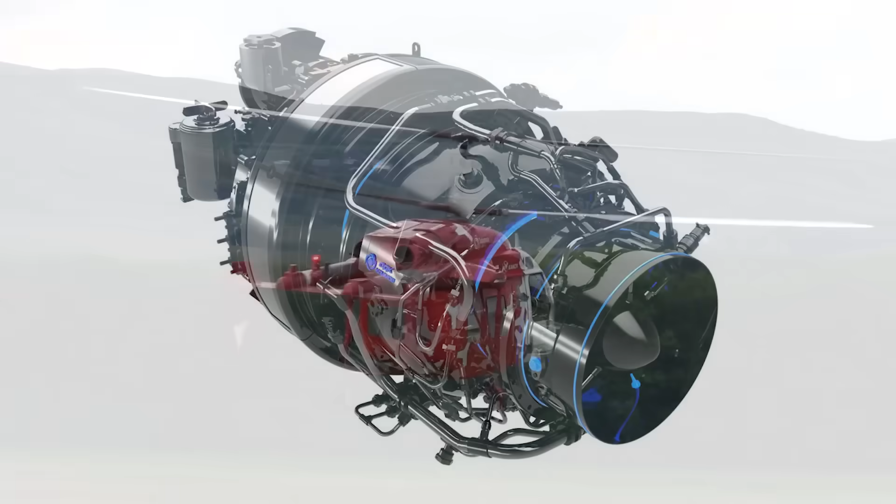In a recent video, I talked about the new Russian VK-1600V engine, which is preparing to lift the Ansat and Ka-226 helicopters into the sky. This engine is not very powerful and is as simple as possible, so simple that some people actually got bored. Well, it's time to add some spice, because the VK-1600V has a brother: more powerful, complex, and curious.

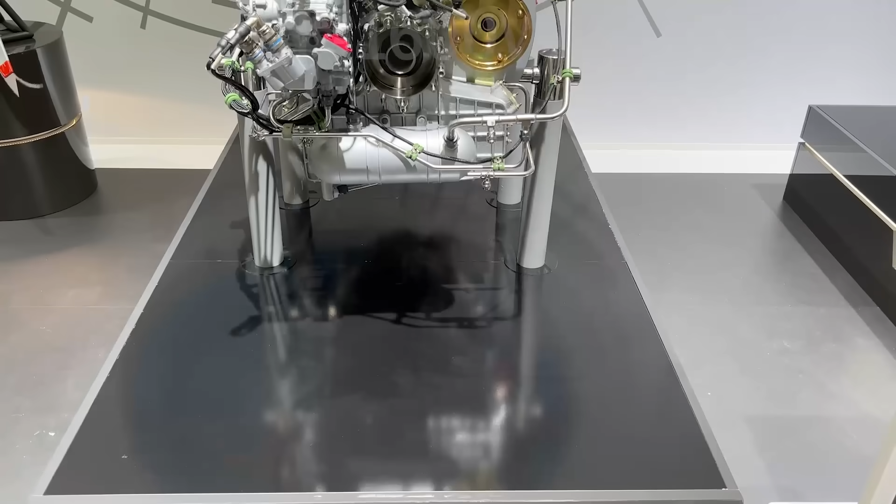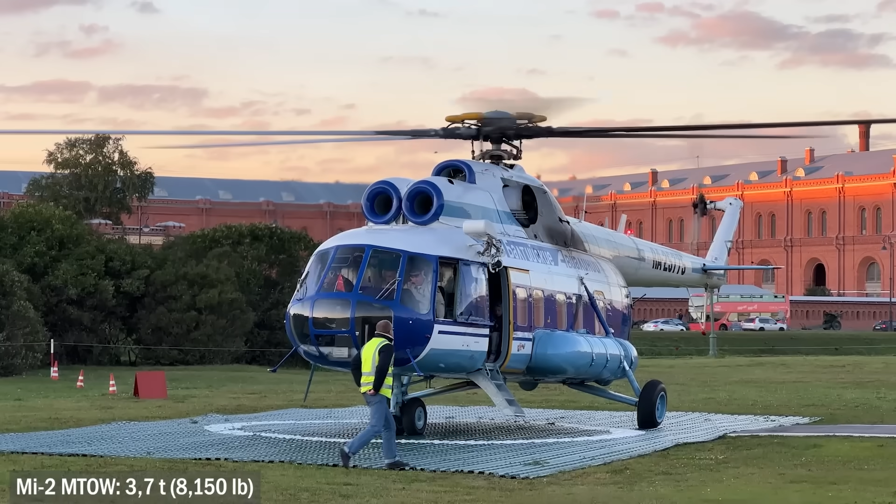In the story about the VK-1600V, I talked about light helicopters and their adventures in the USSR and Russia. In the case of this engine, we are talking about medium helicopters, and their history is simpler. There were practically none. Light helicopter transportation was carried out by the Mi-2, weighing about 3.7 tons, and a step higher is the Mi-8, a workhorse that flies anywhere and anytime, perceived by many as a kind of minibus. But actually this minibus is a hefty 12-ton helicopter like the Sikorsky S-92, and it's very difficult to call it a transport slightly larger than the Mi-2.

In situations where a helicopter with a carrying capacity of more than 4 tons carried 10 passengers and 5 suitcases, economists cried and asked to make something more optimal. The solution to this problem was supposed to be the brainchild of the Kamov Design Bureau, the Ka-60, which a little later grew into the current Ka-62.

And this project became a great long-term construction. There were many reasons for this: lack of funding, project stops, engineers being busy with more interesting programs. Demand was also small. In an open-world market, many operators without bothering went to foreign manufacturers, who offered excellent machines for every taste. In addition, the Ka-62, like its peers, turned out to be very dependent on foreign suppliers. A significant part of its components were purchased abroad, which cut off the interest of government agencies.

And then we found ourselves in 2018. As part of several programs of the notorious import substitution, various components of the helicopter began to be replaced with domestic ones. And of course the main one was the engine. The power plant of the Ka-62 was a pair of Safran Ardiden 3G turboshafts, and the fiery French were to be replaced with a new engine that met modern requirements.

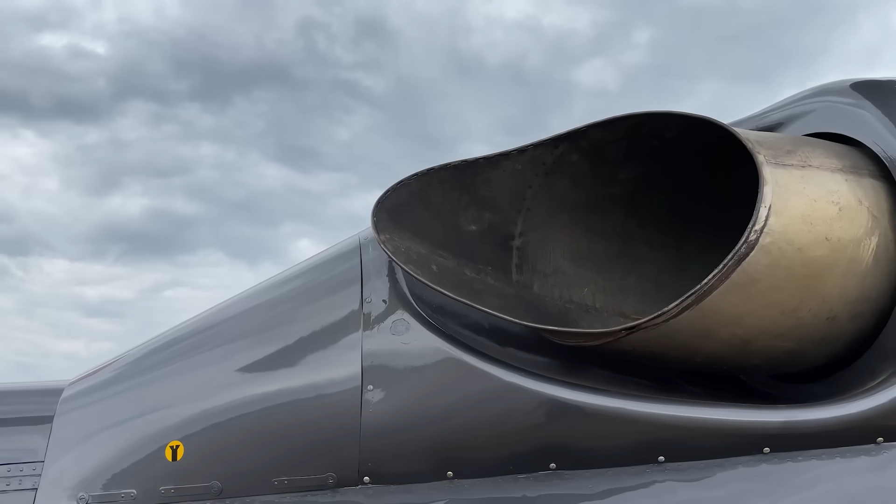The United Engine Corporation, UEC, has finally plucked up the courage to enter one of the largest and most competitive niches in the market for turboshaft and turboprop engines, in which all the large and toothy sharks are present. By 2019, the project was officially initiated and implemented within the walls of the Klimov Design Bureau, located in St. Petersburg. Yes, the Klimovs were working on 2 projects at once. One team was making the VK-1600V, and the second, today's hero.

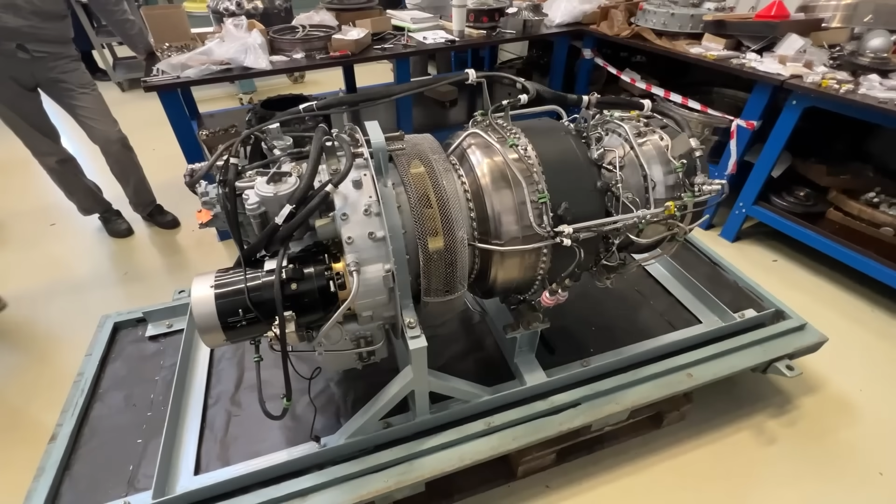Okay, enough history. It's time to look at this piece of engineering. Standing before us is the prototype, which is now being actively tested on stands, assembled and disassembled, a live test model. The general concept of creating this engine is similar to its brother: it should be quite simple, cheap to operate, economical, and reliable. The general design is more or less classic.

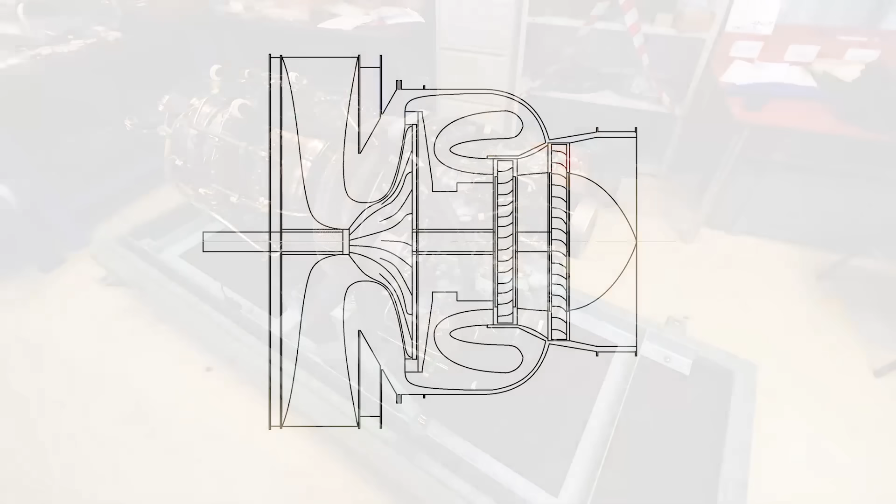Air enters the engine through the annular air intake, is pressurized by the compressor, ignited in the counterflow combustion chamber, rotates the compressor turbine driving the engine systems, and rotates the free turbine, which transmits rotation to the transmission and ultimately to the rotors. But the power here is serious.

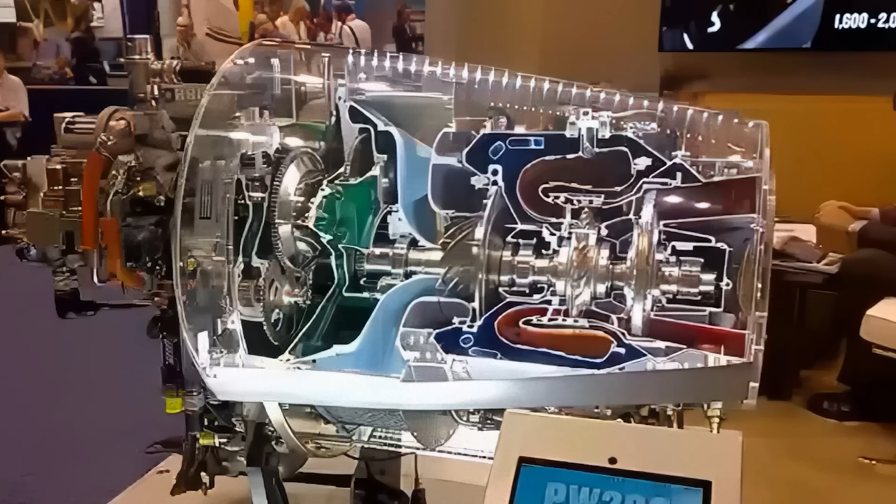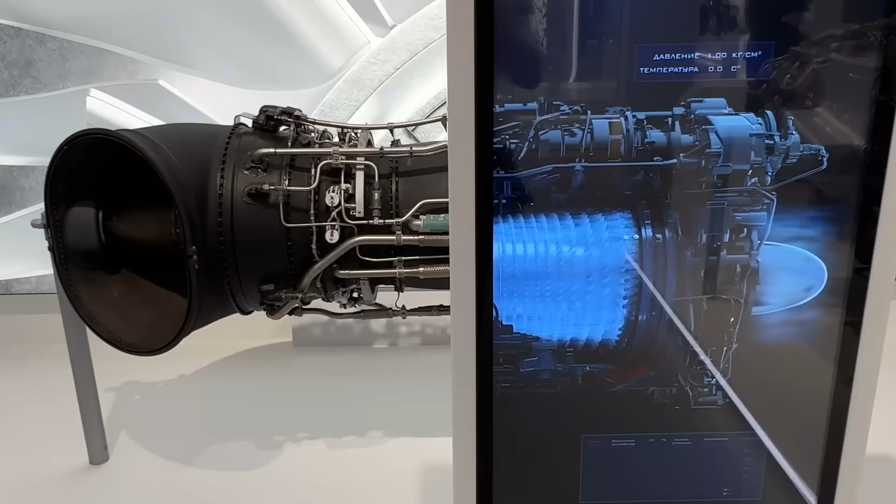In cruising mode, it is 600 horsepower and 900 horsepower - yes, there are 2 cruise modes. At takeoff, it is 1600 horsepower, plus emergency mode, when the engine can be cranked up to 1750 horsepower for 2.5 minutes. Unlike the small turboshafts, which for the sake of optimization are as narrow as possible and differ little from each other, engines with power ranges like this one are more complex, and designers have some room for creativity. There are different dimensions and layouts, assemblies of different types of stages, axial compressors, centrifugal ones, whatever your heart desires.

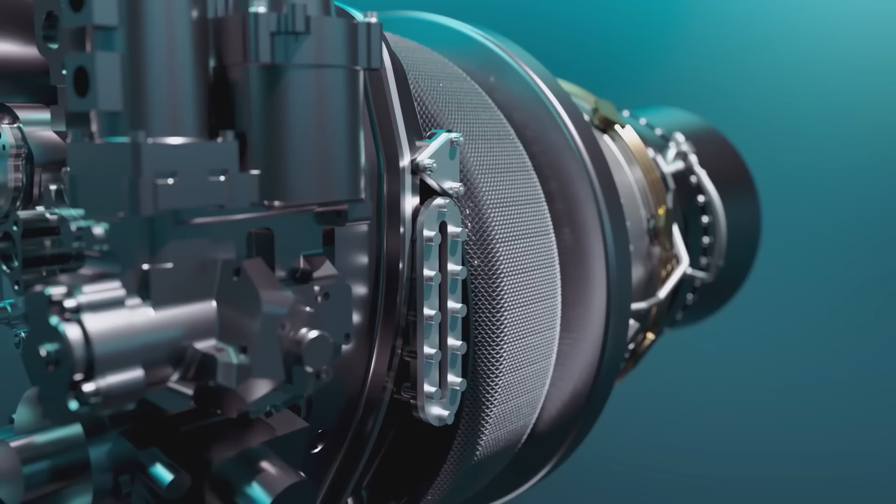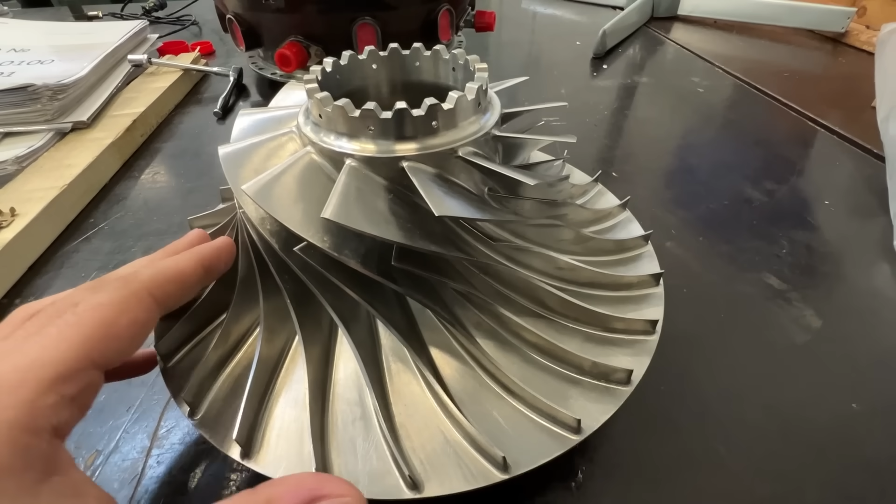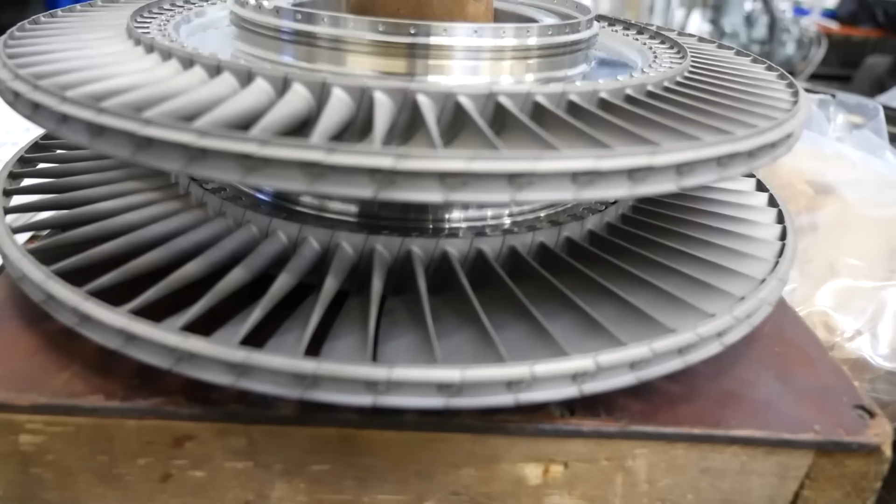Engines from different manufacturers are slightly different in design. In the case of the VK-1600V, the engine builders, while maintaining a generally simple layout, installed a 2-stage compressor, two centrifugal blocks, behind the counterflow combustion chamber there is a two-stage compressor turbine, and behind them a two-stage free turbine. The Klimovs did not come to the 2-2-2 scheme immediately, but as a result of a large amount of research that showed the benefits of installing paired stages instead of single large ones.

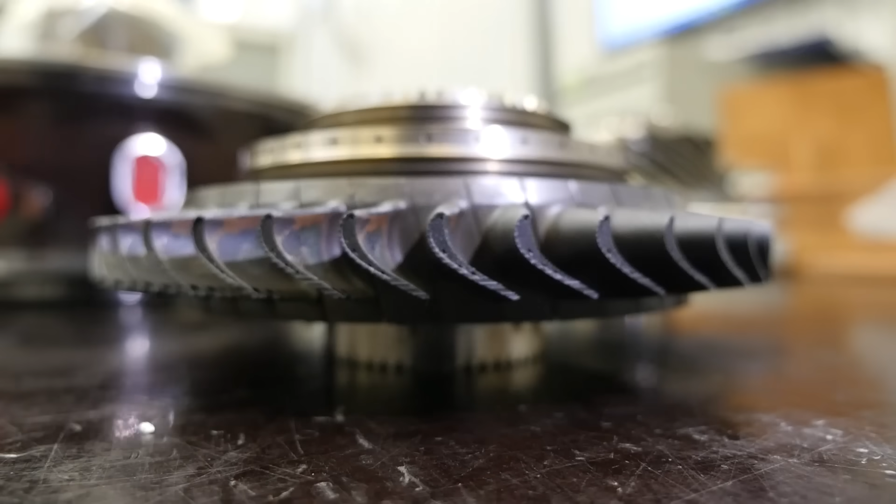Firstly, a large turbine increases the size of the engine, and secondly, there is a not entirely obvious conclusion: two stages in total are lighter than one. It would seem strange, but if you look closely at the disc itself, you would notice that a significant part of it is practically monolithic metal, and in a large disc there is a lot of this metal, which adds significant mass. Even with their small dimensions, these things are terribly heavy.

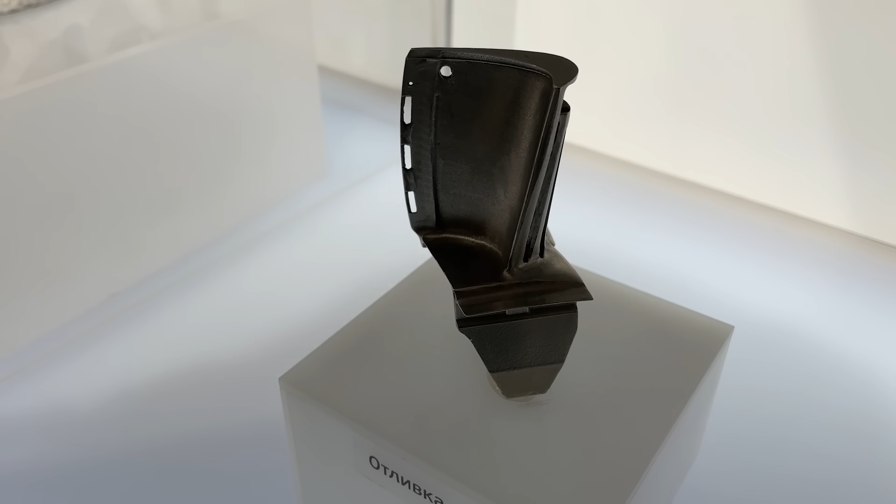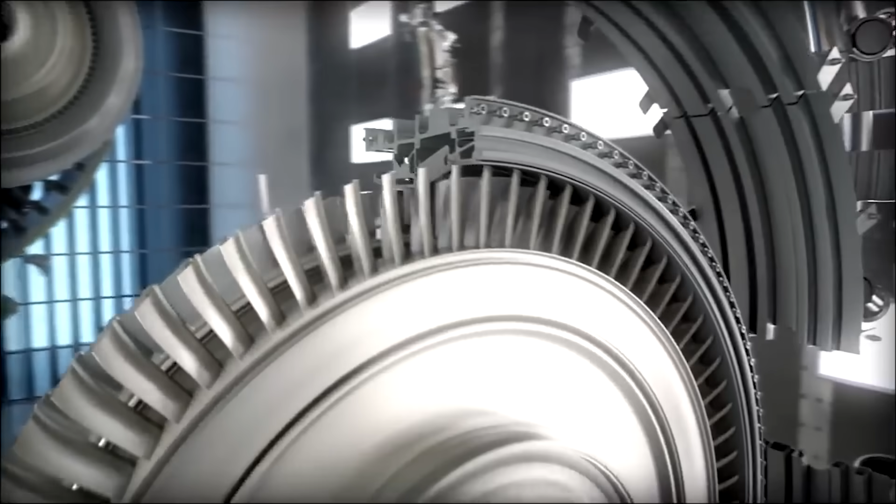Another useful solution from Klimov was the installation of cooled blades on the compressor turbine, which takes on most of the heat. Each blade has channels through which air passes to cool it. This allows an increase in the temperature at the outlet of the combustion chamber, increasing the efficiency of the system. This solution in engine building is not revolutionary and is quite actively used, but it is used mainly on large engines, and in the VK-1600V class it is considered a bit too complicated, so it is quite rare.

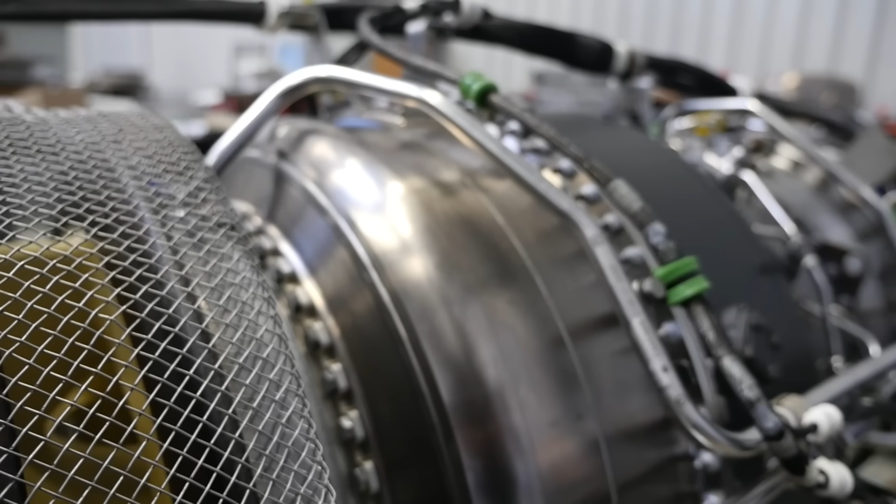The Klimovs decided to take a step forward here. There is a risk of complicating production, but the return could be decent.

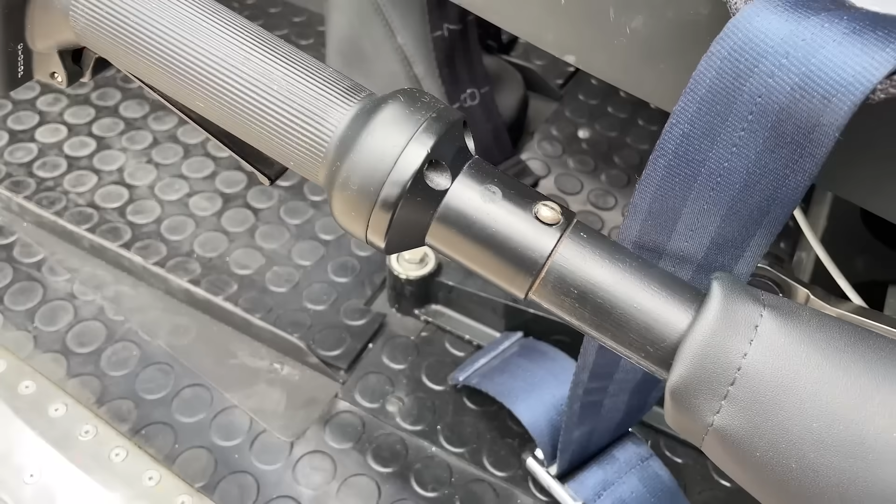At the front of the engine there are auxiliary elements: transmission, cooling, fuel and oil systems, and so on. The automation here is also new. The digital engine control system FADEC on the VK-1600V is the BARC-15V unit. The Klimovs did not complicate their lives here and unified the BARC-15V with the BARC-5V, which is also made by them for the VK-650V. The hardware and software are different, but externally it is difficult to distinguish them. They are practically the same black metal box.

In general, the VK-1600V remains at the level of its colleagues. Nothing supernatural, but it should not be inferior in anything. Its dimensions are quite optimal. Again, it can be installed on the Ka-62 or other helicopters of this class without any modifications. For the sake of simplifying adaptation to the new engine, in terms of dimensions and connection schemes, the VK-1600V was made very close to the Ardiden 3G, so remotorization should go without problems.

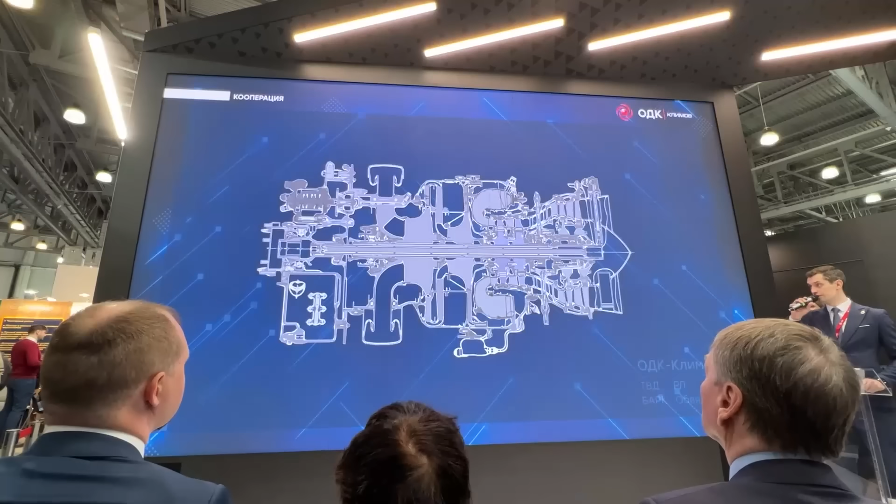Now comes the obvious question. In the video about the VK-650V, I said that the engine is as simple as possible, and by adding modern solutions and technologies, Klimov managed to create it quite quickly. Work began in 2019, and certification is already planned for 2024. The VK-1600V is larger and more complex, and yet it is created at almost the same speed. The secret here is simple: the modern solutions used to create its little brother, the 650, have been pushed almost to the limit.

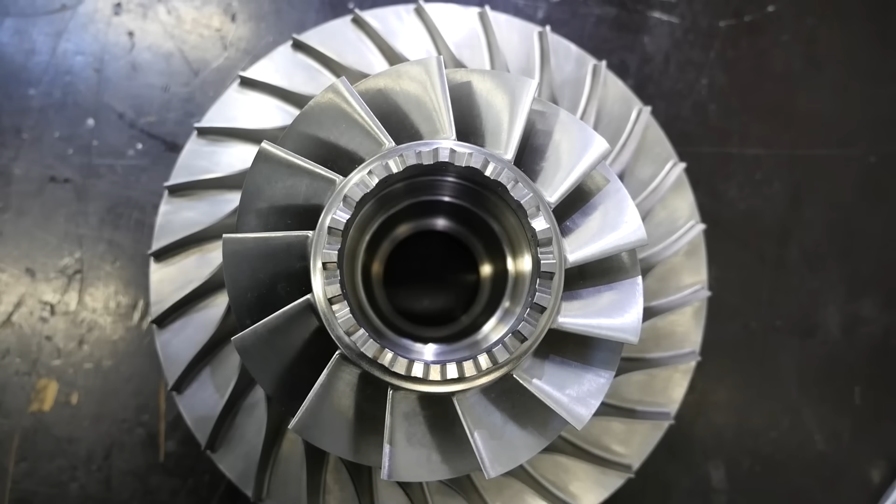Digital design here is taken to the absolute level. Computer modeling, 3D, digital twins, everything is now on screens, no paper. Such solutions can significantly speed up work. The question may arise: here the potential was used to the fullest, but was it not the case for the 650? Why not? I don't know. It may be possible that there was simply not enough resources for both projects.

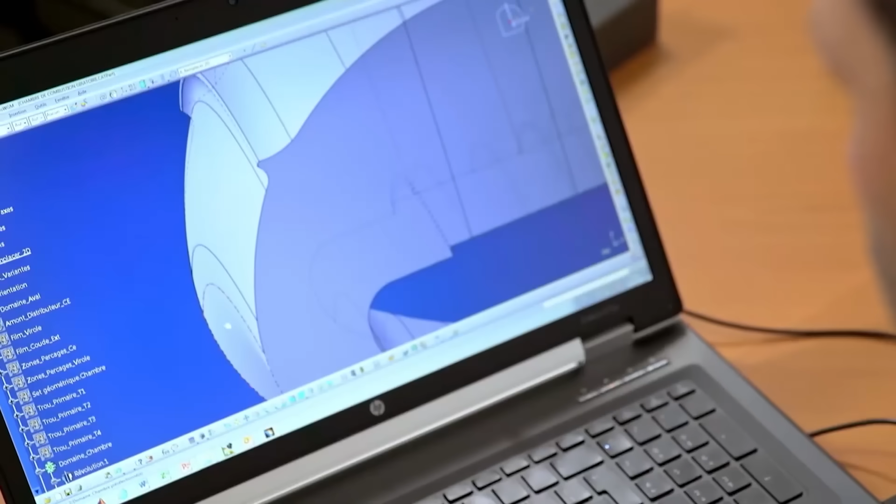All these methods simplify the overall work, but they need to be mastered first. At a minimum, highly qualified specialists are a hard-to-get asset.

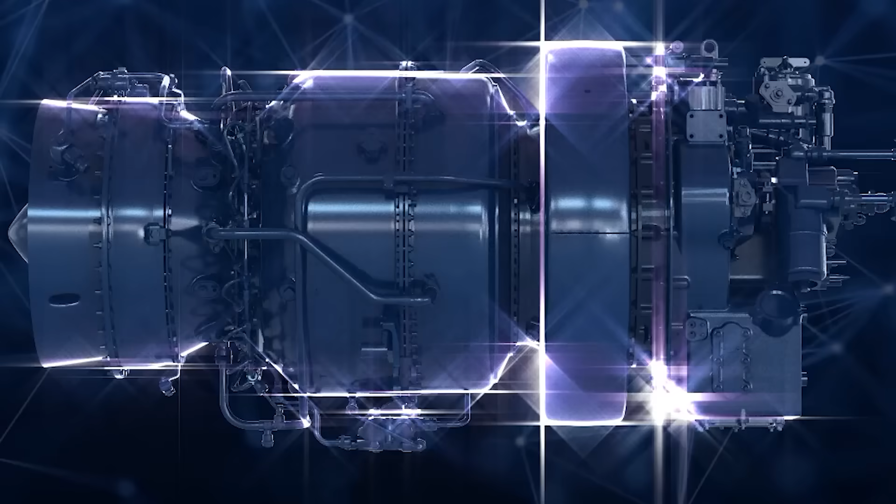Additive technologies are also used extremely actively. In the process of creating demonstrators and prototypes, they printed everything they possibly could, and not only simple elements, but also complex parts made of heat-resistant alloys. About 70% of all casting on prototypes was done on a printer.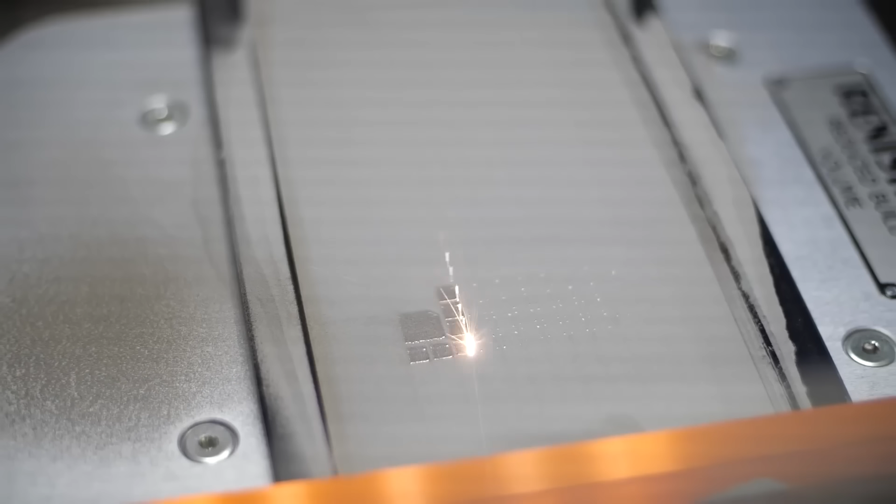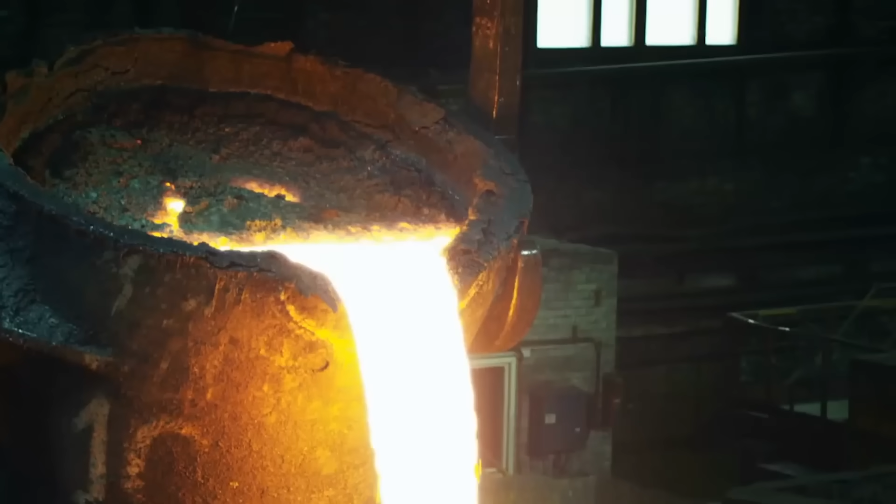Coupled with the fact that the engine was created on a computer from the very beginning, the transfer of documents to specialized production was quite simple, and they did everything quickly. It took 2 to 3 months to create parts, but if everything was done with a classic serial approach, the same result would have taken 10 months every time.

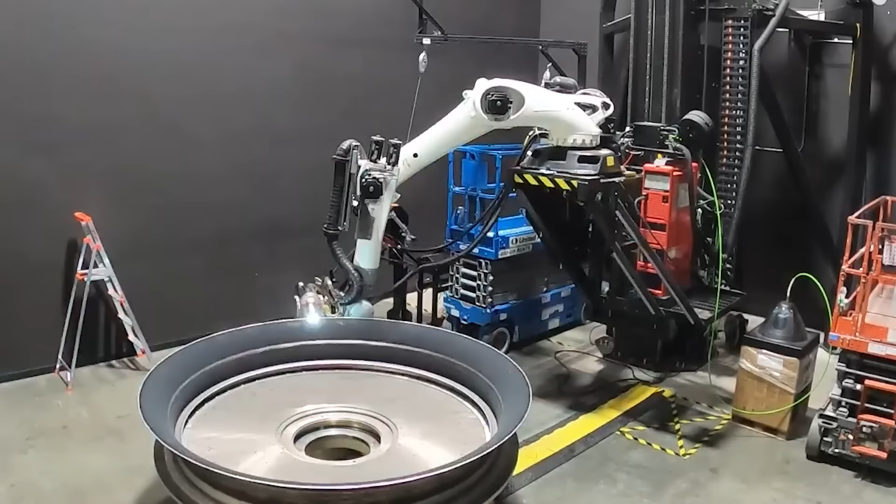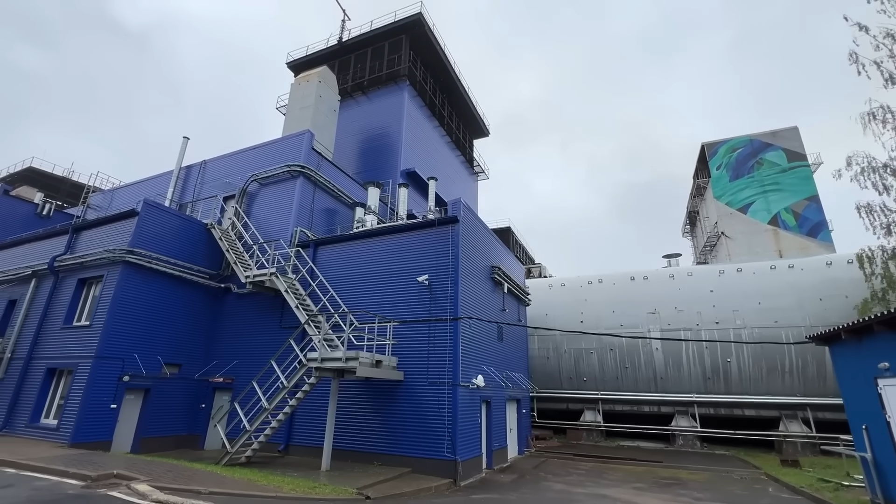Considering that during the testing process, parts were created, checked, rejected, and created anew, without 3D printing, the work would have lasted for many years. Thanks to all this, testing is being carried out much more actively than usual. To speed up work on the program, Klimov engineers built 2 test stands at once, now operating in parallel.

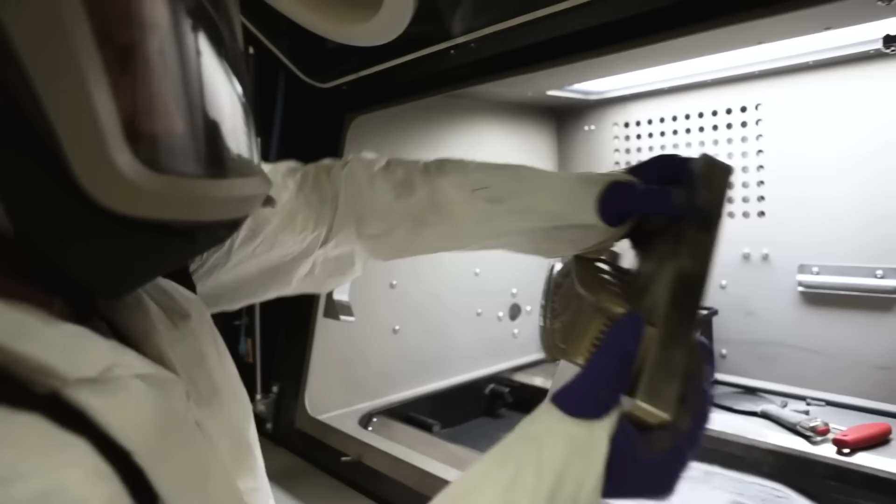Again, there will not be a huge number of printed parts in the series, a regulatory framework and certification of technologies are needed, and printing serial parts in large quantities is more expensive than doing it on a classic production line. At the same time, I would like to note an interesting test result. The printed parts have a very decent performance, and in theory, could be used on production motors. So the question here is not so much technical as economical.

The engine at the moment continues testing on stands and is being prepared for installation on the Ka-62, now at the level of digital doubles and then live, with subsequent testing and certification of both the engine and the helicopter. Serial production should be deployed in 2025, and by 2026 we should see the Ka-62 with the VK-1600V engine in operation. The plans are ambitious.

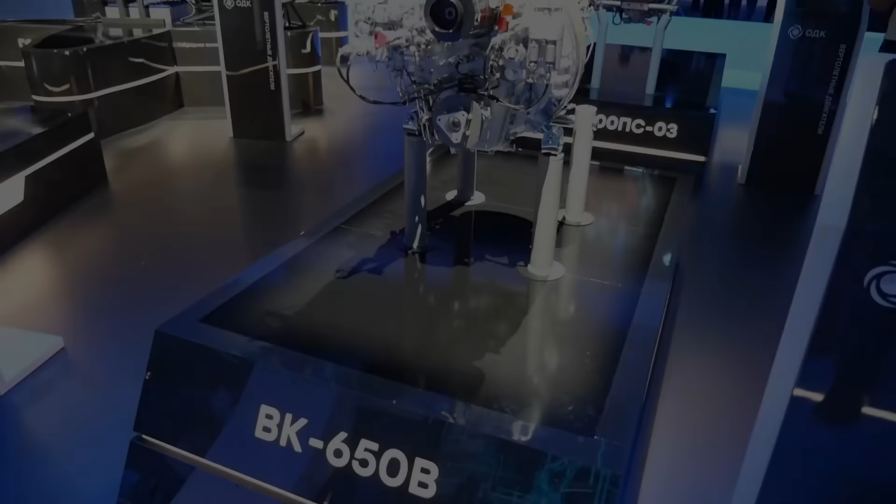And ironically, the main risk for the VK-1600V, in my opinion, lies not in itself but in its client. While the 650 is planned to be installed on the Ansat and Ka-226T, that is, 2 helicopters at once, which are already being supplied and are in operation, the 1600 is planned to be installed on the Ka-62, on 1 helicopter, which is not yet mass-produced.

To expand potential demand, there are plans to create a turboprop version, the VK-1600S, for small aircraft and local airliners. And the need for such devices is obvious, but again, there are a lot of factors that hardly depend on the engine builders. Aircraft, after all, are not their area of responsibility.

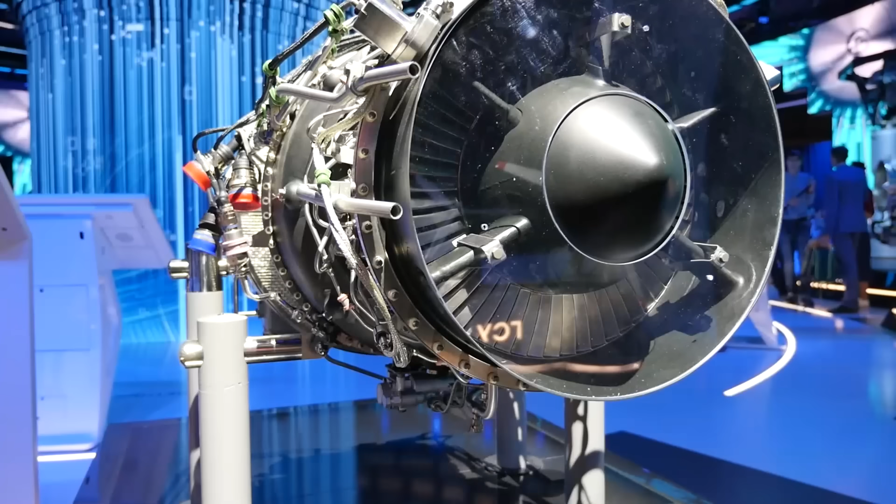Is there a risk that having made an excellent engine, Klimov will encounter insufficient demand? There is. You can't relax here. But the current situation can play into the hands of aircraft manufacturers. The domestic commercial market for the Ka-62 class helicopters was previously occupied by foreign machines, which are now obviously less available. Plus, after replacing foreign components with domestic ones, the Ka-62 will become much more interesting for government agencies.

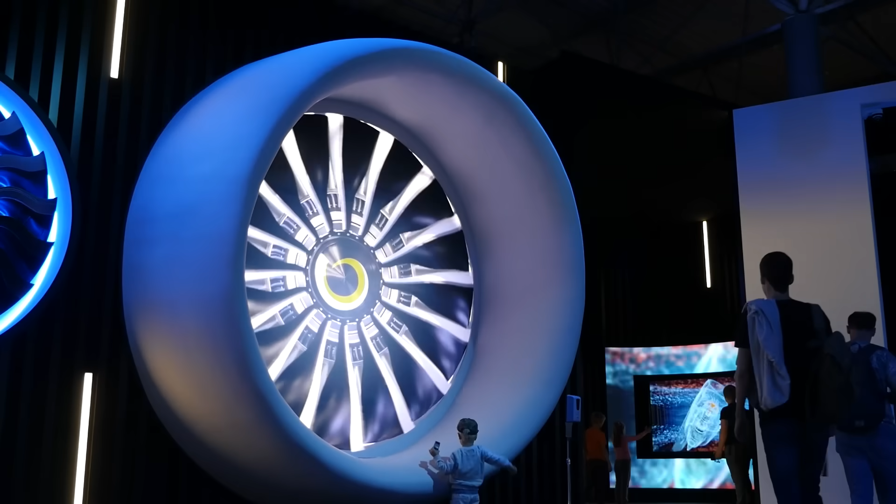It's the same with airplanes. Annushka is of course our eternal love, but one day Grandma will have to retire. And here, engine builders and aircraft manufacturers will have to work hard. If planes with the VK-1600S turboprop also appear, then the demand will be great. Klimov will deploy a large production, and UEC will receive a live line of modern engines.

As usual, we will draw conclusions in 10 years or so. On this, I think we can finish the story.